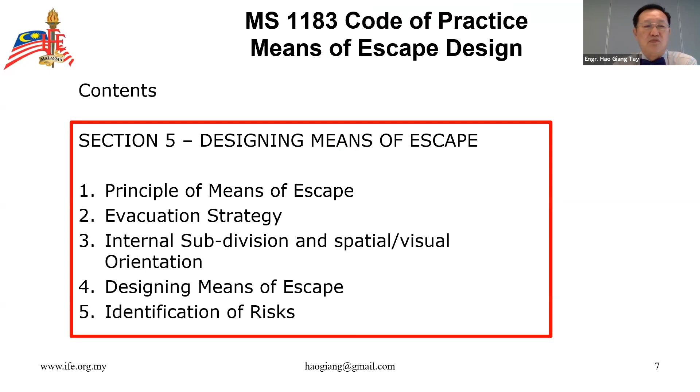You can look at that. This is the standard. As I say, it is quite expensive, but it is relevant, and it's very interesting. This is from BS 9999. In section 5, designing means of escape, you look at principle of means of escape, evacuation strategy, internal subdivision and spatial visual orientation, designing means of escape, and then identification of risk. They broke it down into several subsections, and then continue with minimum package of fire protection, horizontal means of escape, vertical means of escape, and additional means of fire protection. During my last session, I talked about the difference between horizontal means of escape and vertical means of escape.

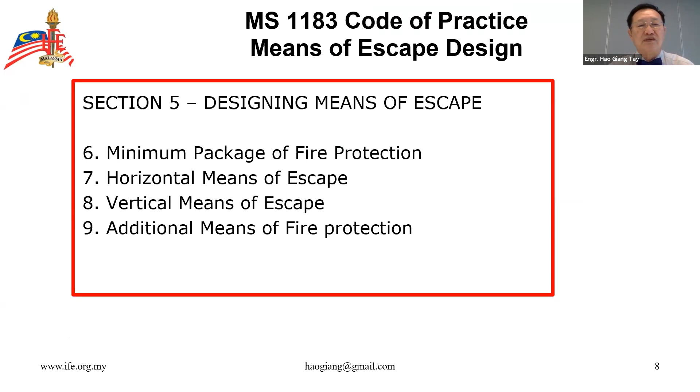The principle of means of escape is that provision for adequate means of escape should be determined and assessed against the development of the fire threat, time taken to egress, together with expected reaction and subsequent actions of those responsible for the management of the building. Assessment against the development of fire threat is at the moment not taken into consideration. That's why I always say that for professional architects or engineers, the fire module is lacking. If you design a building without looking at the fire risks, the fire threats, and also human response, then it will not be a complete design.

So the objective of means of escape design is to limit the time taken to travel through the areas of a building which could potentially be exposed to fire and smoke. This eventually also involves smoke control and management, which I have no time for today. Because for people to escape, we need a clear smoke height of at least 2.5 meters, and if you use a ventilation dilution method or purging method, nobody can survive. I will not elaborate here, perhaps in another webinar.

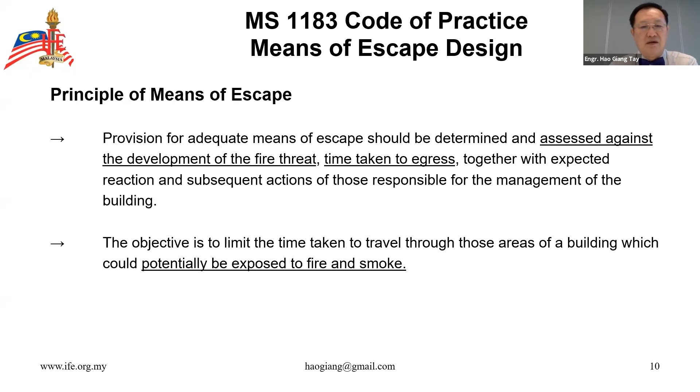Now, once you hear the alarm, what is important is the response time. How much time is taken to respond to the alarm? You decide to get up, walk to the door, go to the protected corridor towards the fire escape staircase, or you're too busy because your boss tells you that he needs you to finish the report before 12.

Then if you go further up, you'll be looking at 8, life safety strategy completed. That means this particular period, from the moment the fire developed until you evacuate, is called required safe egress time. Because when you get out of the building, you complete the objective of egress from the building.

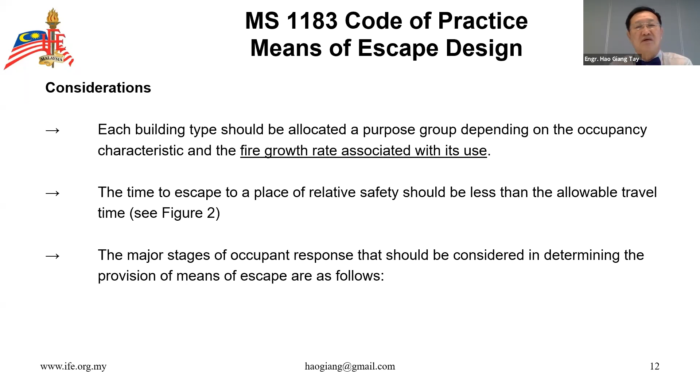Considerations for means of escape design. Each building type should be allocated a purpose group depending on the occupancy characteristic. Of course, you got all the schedules to refer to in UBBL. And the fire growth rate associated with its use. At the moment, this part is missing. We do not have the data bank.

That's why I always say, for an architect to actually design a safe building, you need to have a better understanding of fire behavior, smoke danger, things like that. Then only you can assess the risk. And then the data that is being stated in the UBBL becomes more meaningful. What do you mean by 1.12 second per meter of egress time horizontal, and what do you mean by 80% of that going down a staircase?

It's meaningless unless you look at where is the fire happening, how big is the fire, and who are the people you're looking at doing the egress. Are they senior citizens? Are they children? Are they people with disability? Or are they all assumed to be healthy young Malaysians of 20 years old, identical physical condition with the same leg length? Then only they can move uniformly at that rate.

We are now using one single rate to calculate the egress time, which I think is grossly insufficient and needs to be reviewed in this modern age. All right. The time to escape to a place of relative safety should be less than the allowable travel time. So there's two ways. One is that you go down vertically and egress the building, or for special categories of buildings, like healthcare facilities, hospitals, you can't move them. So you have to move from one compartment to a safe refuge area. But that's a different ballgame altogether.

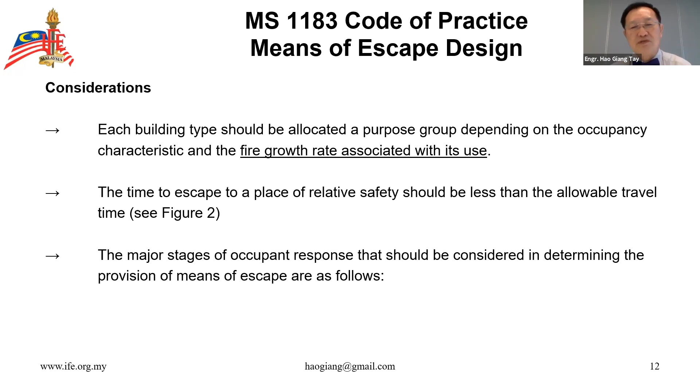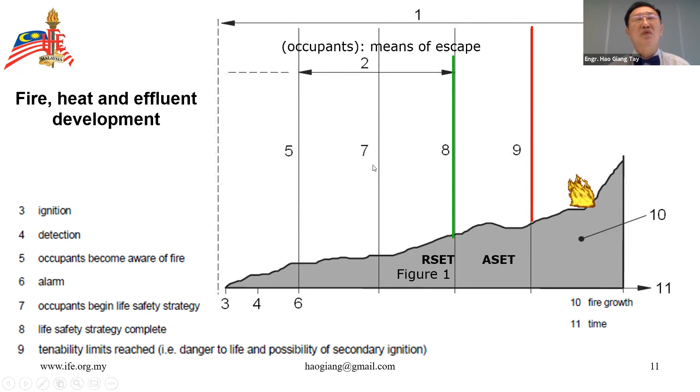Major stages of occupant response that should be considered in determining the provision of means of escape are as follows. Factor for mass evacuation. Time to detect a fire and sound an alarm. Now, talking about sounding the alarm, if you go back to look at the response time, do you think that people, when they hear the alarm, will start to prepare to move and then move? The answer, of course, is no. 85% of the people in the world, according to statistics, do not respond to fire alarms. Ask yourself, if you're in a shopping center and you hear the fire alarm, do you continue shopping or do you walk out of the shopping mall?

Let me tell you, of probably 5,000 in KLCC, every time the alarm rings, I'm the only one that walks out, looking like an idiot. But I know in my heart that if anything really happened, I'll be the only one that survives.

Okay? Pre-movement time, which consists of recognition time and response time. Travel time, including queuing, to a place of relative safety. And movement within a place of relative safety: protected corridor, smoke lobby, escape staircase, or adjacent compartment. All these, provided the relative safety compartments are all protected, free of smoke and flame. And that is another module we have to look at, why a protected corridor must be pressurized and not used as a purging compartment.

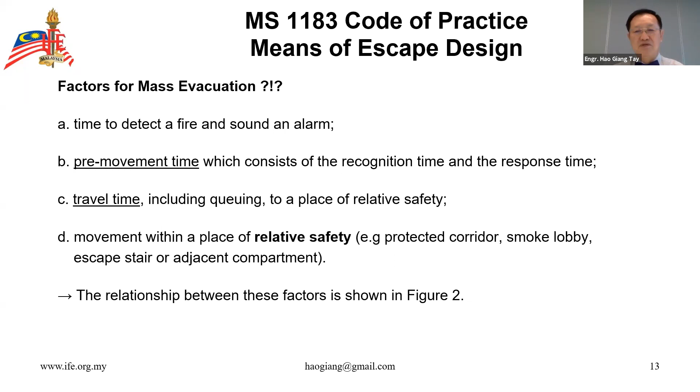All right. Then you've got the relationship between these two factors in figure 2. This one will show a clearer picture. Ignition, then you got detection time. Sometimes it takes about 2 to 3 minutes, depending on the sensitivity of the detector. So the fire started, picked up by detectors. The detectors will then send a signal to the fire alarm panel. The alarm will be raised. This is where the audio visual alarm is raised.

And then upon hearing the fire alarm, sometimes it still takes about a minute for you to recognize that it's actually a fire alarm. Then you make up your mind whether to move or not, right? So this is pre-movement time. It depends. A lot of performance-based engineers put about 3 minutes here, which I also disagree with, because if everybody ignores it, this becomes infinity. Everybody will still be staying around, and at the end, you exceed your available safe egress time. So from when you start to move until you evacuate, this is actually the available safe egress time.

All right, this is the period until you evacuate. This is the safe egress time. Sorry, this is available safe egress time. Now, number 7 is actually the required safe egress time. That means the time that you require to actually get out of the building, get out of the building before it becomes untenable. Red means that the temperature or the smoke level intensity in the building is already too high for occupants. All right.

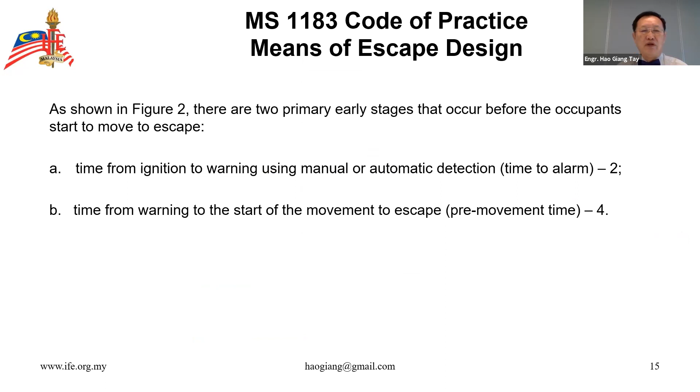So there are 2 primary early stages that occur before the occupants start to move to escape. One is time from ignition to warning using manual or automatic detection, time to alarm. Second one will be time from warning to the start of movement to escape. So it's 2 and 4. So these are the 2 crucial timings before you look at how long it takes to go down the staircase.

But the question I'm also asking now is, we keep designing higher and higher. In the last paper, I looked at Saudi Arabia building a building that is 1 kilometer into the sky. I don't think we look at that. We look at, let's say, our tallest building in town now is 118 stories. Now tell me frankly, how many of you think you can walk down 118 stories within the fire escape staircase in one go to stay alive? I think most of the answer is no, unless you're very fit, okay?

And it's not only you. You are only one of the participants evacuating downwards, descending in the fire escape staircase together with the rest of the occupants. If somebody in the front is slower than you, your flow will be disrupted. And then somebody behind that's impatient probably will start pushing and then end up with a stampede in the fire escape staircase with some broken legs and all that. And then eventually the whole staircase will be jammed.

Now, so we are looking in a realistic design: high-rise fire escape staircases, are they really safe? It's not just code compliance. It's not prescriptive, where you put a figure there, the width of the staircase can take so many people, complying to the floor density. No, I think you could seriously look at whether you can really get everybody out of the building. All right. This is fit for purpose, performance based within prescriptive code. All right.

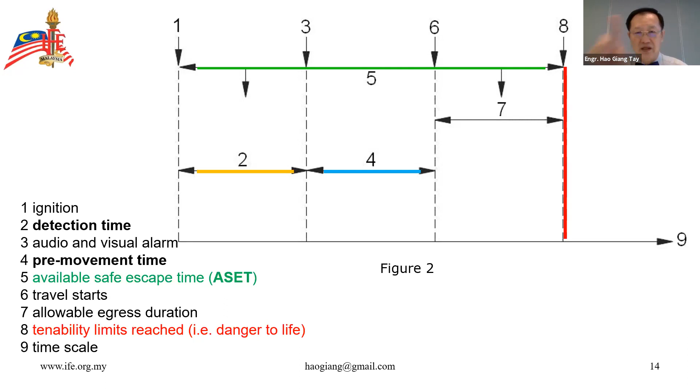Design consideration and movement to escape in many cases might not be along the optimum travel route because if you look at our UBBL, we are supposed to take only 50% of the egress as effective, just in case the other egress path is being blocked by smoke or fire. So in that context, now you understand why you need more staircases. Why do you need to make sure that the integrity of the protected corridor, smoke lobby, everywhere is being protected, all right?

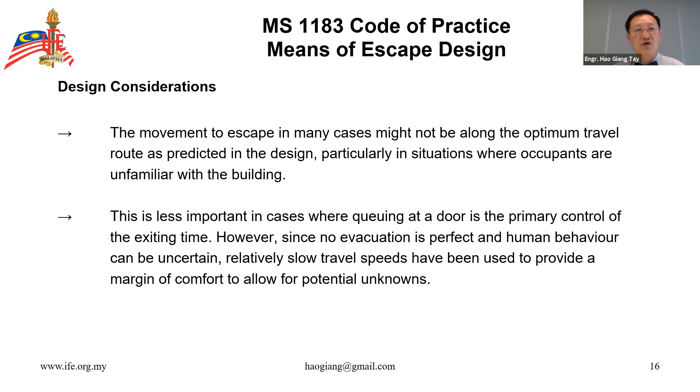Before you look at pressurization, smoke control. And also, don't forget that there is also queuing time. It doesn't mean that when you go to the fire escape staircase, the whole staircase is clear for you to descend. Sometimes there is a crowd waiting to actually go through that particular door. All right, so all these must be taken into consideration.

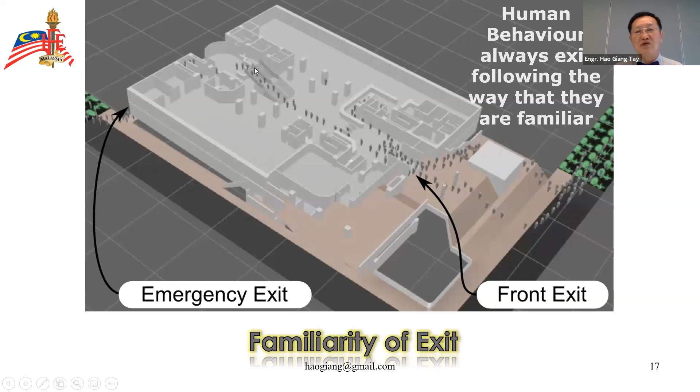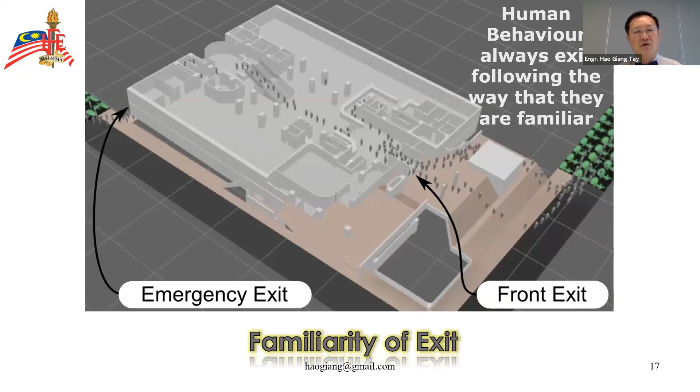Through many fire incidents, there's always good feedback, and this is one of them. Human behavior always exits following the way that they are familiar. So, assuming that this is a shopping mall, and you enter from the front, unless you're very familiar with the layout, normally for people who visited this mall the first time, if they are actually at the back and there's another exit that's nearer, they will not use it. They'll backtrack all the way to use the route that they are familiar with. This is human psychology, all right? It has been observed in many fire incidents.

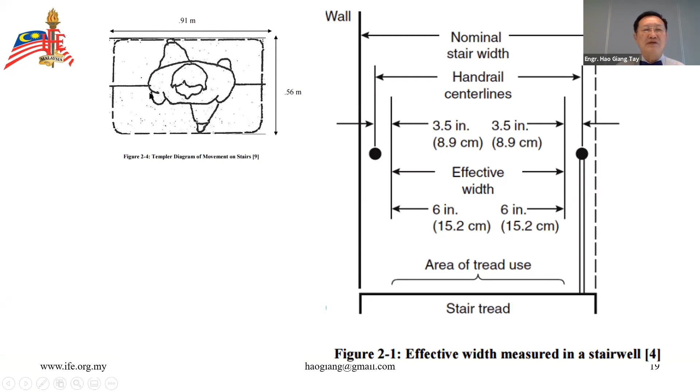Research-based means of escape design data. This one is also very interesting. You can take a look. Now, we always design using fixed data that's given to us, and we expect everybody can actually use it. But if you look at Scandinavian countries, they actually measure the person's space required during egress. You cannot take it that people are moving very close to each other, because psychologically you never will. And you also will never move along a corridor touching your shoulder with the wall. So when you look at the egress design, you've got to actually take all this into consideration.

The research done in Sweden is very interesting. In fact, they put a camera on top to look at actually the perimeters of a person when they are moving, the legs in front, the legs behind, and when they are standing still, all right? So you can see that this is actually more of a performance approach using realistic data that has been established.

You're looking at about 0.9 meter with 0.56 meter of space that you need to allocate per occupant. Then you look at how many persons are actually moving along the corridor. It's no more just floor density. Those are prescriptive; this is actually realistic. And with this, at least the end result will be different.

Then look at the staircase, this is a stair tread. You've got the wall, you've got the handrail, and you need the spacing, all right? Because nobody will walk touching the handrail, so you need another 6 inches. So this is the effective width of the egress path, and not what is being stated in the UBBL.

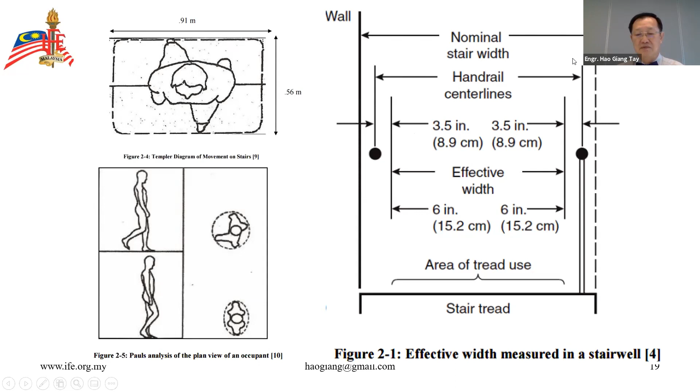This is another illustration whereby that is actually the width that is normally designed, but the effectiveness is not 100% because nobody will walk touching the wall. This is how people evacuate, and you can see that they are not like soldiers, 2 by 2, filling up the whole corridor. No. So if you look at egress, there are a lot of other factors that need to be considered.

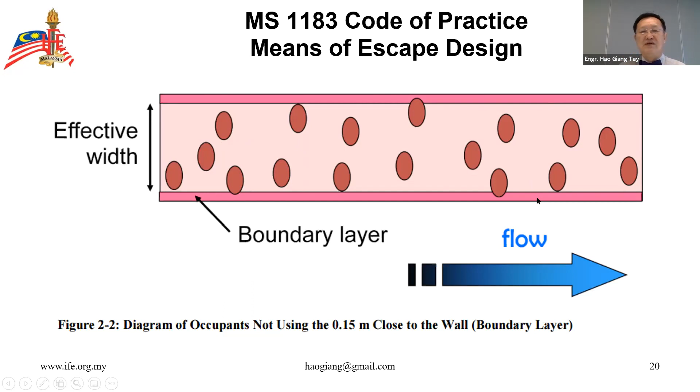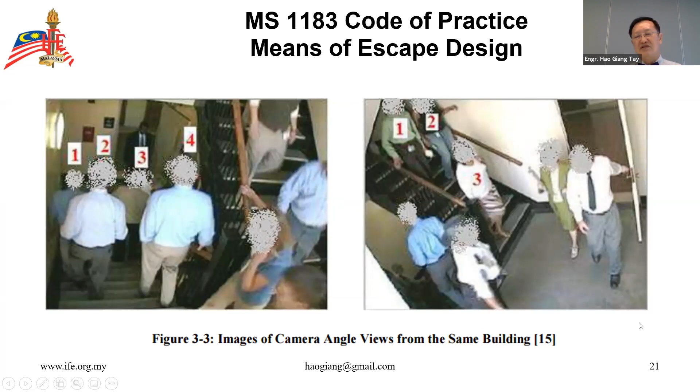They actually do a simulation using real subjects going down, doing evacuation, uninformed evacuation, and they use cameras to track them. All this data is recorded in the computer, and then eventually the data is analyzed. This is actually the first time a lot of studies have been conducted on evacuation. I believe a lot of this research has been carried out by UM as well, in Malaysia.

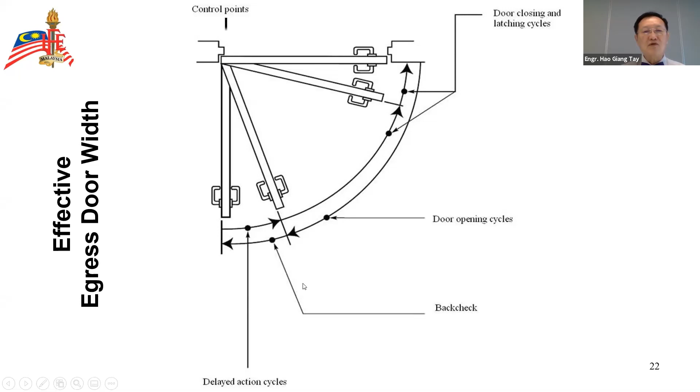So if you look seriously, if you are taking even this width, it's not realistic, because the actual effective width is from here to here, all right? Because as pointed out through the research, nobody will walk touching the surface. So you still need a gap for the occupants to stay away from any objects.

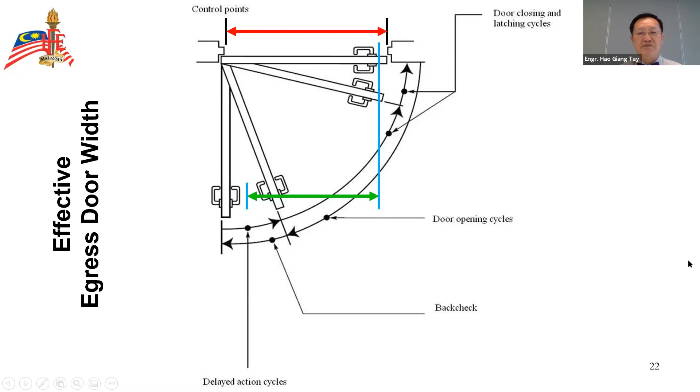So if you were to design using the prescriptive code or prescriptive data, you are again designing an egress width of this nature, which realistically is not applicable. Remember, the research data provided shows that you need space, all right? Front, back, and the side.

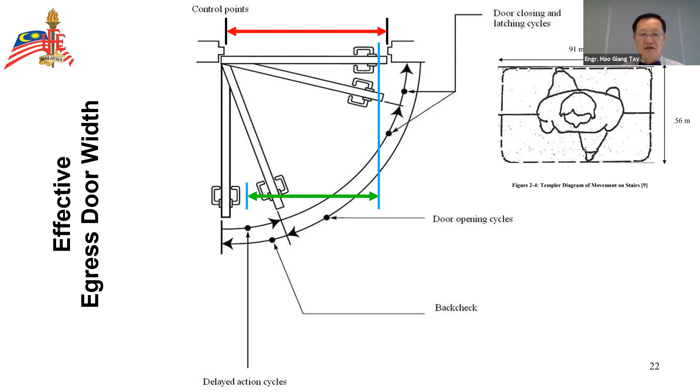Design considerations: in an emergency, there should be sufficient escape capacity to allow all occupants to reach an area of relative safety. Fire integrity is critical because fire doors cut off all the compartment openings. And fire doors in Malaysia have no maintenance. If that goes, you just do not have your protected corridor, your smoke lobby, or your fire escape staircase.

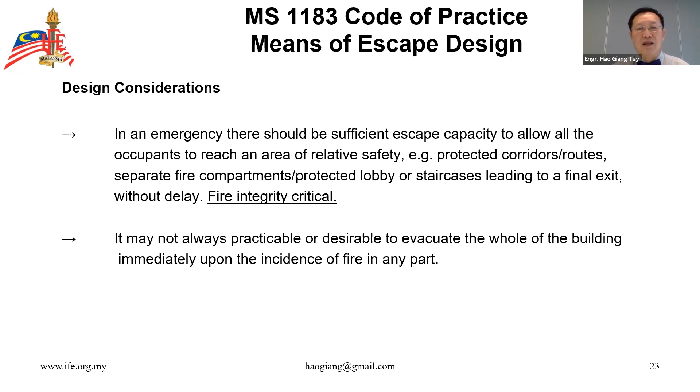Go back to the condominiums, just go and do a routine inspection, all right? Whenever you are in a hotel, whenever you're in a shopping complex, just take a look at the fire door and tell me that most of them are working. Everywhere I go, I do risk assessment, and I'm telling you, I'm really worried because most of the fire doors are not working, either sagging or not closed and latched. You need a door to close and latch, okay?

Okay, of course that's a different ballgame altogether. You need to look at it; it should be managed, should be manned, should be drilled, should be trained. And all these people are not going to be included with the normal occupants. They're supposed to be pre-selected, predetermined, grouped together, and evacuate through the fireman's lift. They're supposed to be differently managed.

What about stampede, panic? When they go down a corridor, there are people who walk very slow, obese, or on crutches, people who are not healthy, and there are people who are young, aggressive, and fast. We can already see that there could be a stampede in the fire escape corridor, the fire escape staircase. So has there been any plan for dealing with a situation like that? The moment you have a stampede, it blocks up the entire fire escape corridor. Then what's going to happen to the required safe egress time? There's none.

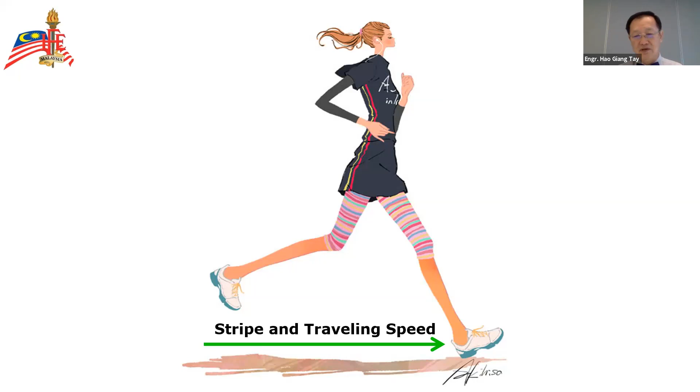Of course, nowadays we have computer-aided software that lets you preview what actually happens during a mass evacuation. Design considerations in large premises or super high-rise structures: phased evacuation is more practical, which is also beneficial for egress for people with disabilities. Now, if you cannot evacuate everybody from a super high-rise structure, then you need to look at this.

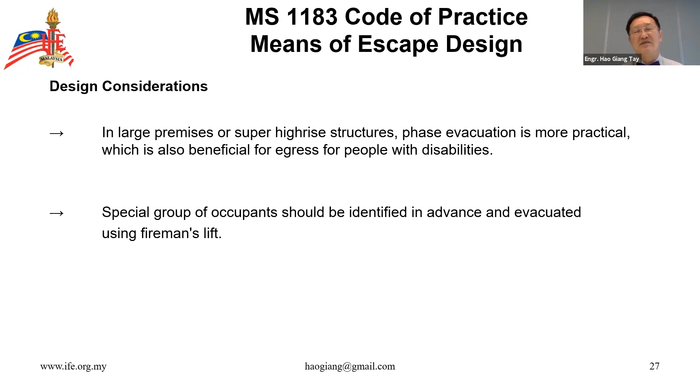Motivation to escape is important. Research into several major fatal fires and evacuations suggests that in mega complexes, people find it difficult to recognize the threat from a fire elsewhere in the building. For example, in a shopping mall, if fire happens at one end and you're at the other end, even though the bell rings, you look around and life is normal—everybody carries on shopping. You don't see smoke, you don't see fire, you don't see the threat.

But smoke can actually propagate very, very fast. The other danger is, if you went in with a family and got split up to different shops, do you think you'll just leave when you see smoke and fire, or go around looking for your family members? Human behavior is irrational. Do we have enough study into this, or do we just assume the moment the bell rings everybody walks out? The answer is no, definitely.

People are also likely to underestimate how quickly a fire can spread. In a fire disaster, the uncertainty of the situation in its early stage is usually compounded by a serious delay in warning the occupants. So there are a lot of factors we need to look into and consider.

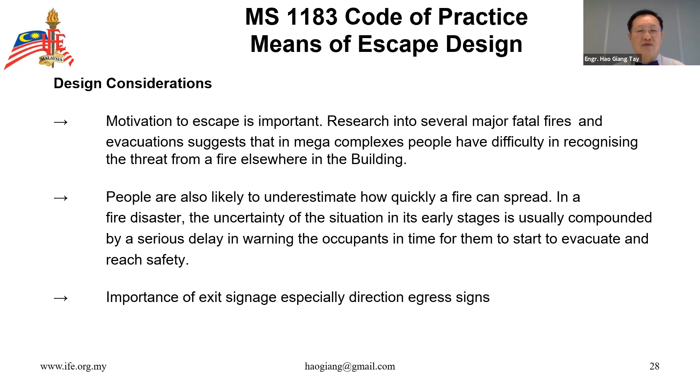Remember where we put all the emergency lighting—along the ceiling. In any building where there's a fire, where does the smoke go? To the ceiling. It flows along the ceiling.

I can tell you, if you look at the emergency lighting, they're all in plastic casings. Do you know that smoke particles, when they leave the fire source, carry a temperature of 250 degrees Celsius? What is the boiling temperature of water? 100 degrees. Some of this emergency lighting, I don't even know if it can sustain the attack and ferocity of the smoke particles—not even fire, just smoke particles, which are burned particles carrying temperature.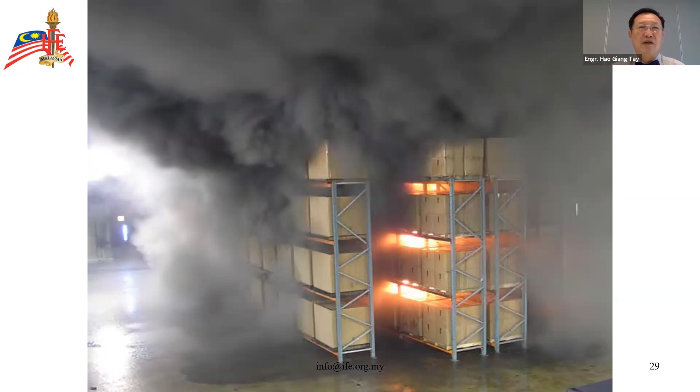So what is the evacuation strategy? The primary objective of any evacuation strategy is to ensure that, in the event of a fire, the occupants of a building can reach a place of ultimate safety outside the building.

This also poses another issue. Last time I was invited to deliver a paper for the Private Association of Hospitals Malaysia. When I talked about assembly points, one hospital's safety manager proudly said, Mr. Tay, we've taken care of that. I asked, where's your assembling point? He said outside the building. I asked, where is this hospital? Gleneagles Hospital on Jalan Ampang. I said, great—all your patients outside. Next morning the newspaper would say patients safely evacuated, but mowed down by the traffic of Jalan Ampang. So assembling point is not just anywhere, as long as you're outside the building.

I also asked them another question: what happens if it's pouring rain outside, a thunderstorm? Perhaps they should employ the bomoh with the fire coconut to make sure that on the day of the fire, the weather is excellent. There are so many things we cannot predict.

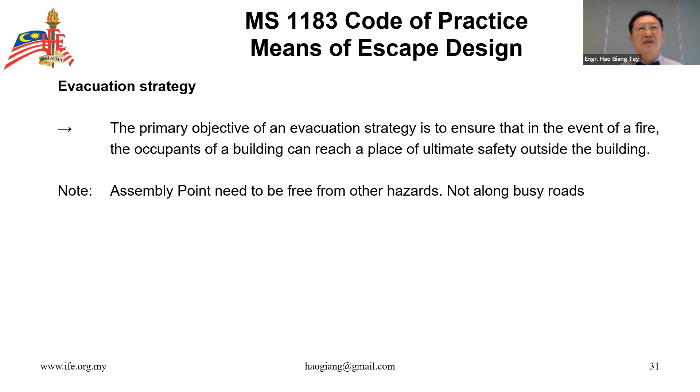In Malaysia, if you look at any evacuation plans, they stick on the wall along the lift lobby. Normally they are full of so much information that you can't even have time to read all of them. So I think the modern evacuation plan should be very simple. The rest of the information is not necessary and should not be included there. You want to indicate the arrow showing the flow of where to get to the nearest fire escape staircase so they can evacuate safely. These are some of the examples.

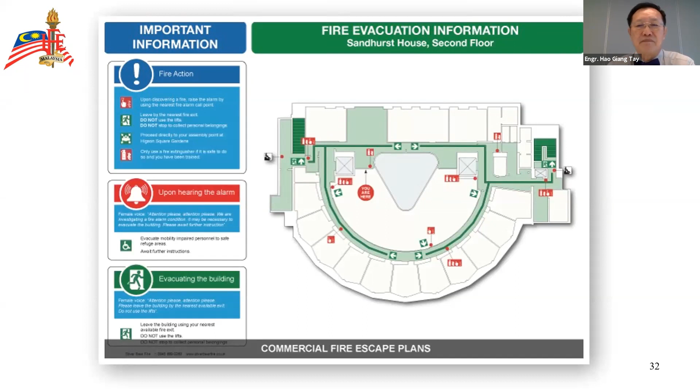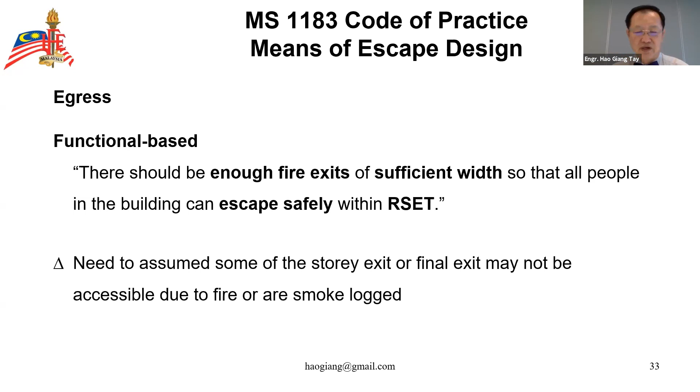So egress should be functional based. It should have enough fire exits of sufficient width so that all people can escape safely within the required egress time. And also, as I pointed out just now, according to our requirement, only 50% of the story exits are to be taken into consideration.

In the past, we always look at mass evacuation, even for high-rise now. But what I noticed is that drills are conducted yearly, but there's no logging of data on how long it takes all occupants to be evacuated. And there's no study or observation of the behavior of occupants within the building. There should be more in-depth studies of behavior of male, female, different age categories. Then with all this data, perhaps you can aid architects in future design of high-rise evacuation.

For super high-rise, definitely you will not be looking at mass evacuation, which we are practicing now. We should be looking at phased evacuation, like Petronas. They have a very well prepared evacuation program. I've been briefed a few times there. Every time the international president of IFE is in town, I bring them there because it's our iconic building, and they conduct a safety briefing for all of us. They are actually very thoughtful about making sure that the moment there is a fire alarm, they have an internal ERT, emergency response team, to go investigate.

Meanwhile, 10 floors of occupants will be moved below the fire floor, just in case, because it's going to take some time. The rest of the occupants will stay and continue working until it is confirmed there's a fire incident. While they're still trying to put out the fire, then the real evacuation mode will be put in place.

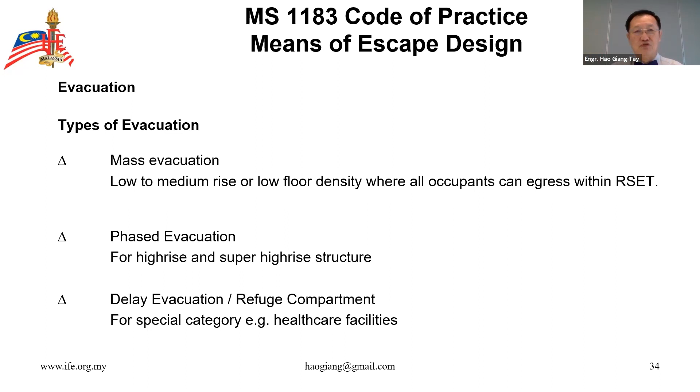Delayed evacuation refuge compartments are more for healthcare facilities like hospitals. I always say hospitals need to practice a zero fire policy, and it's almost impossible to evacuate the whole hospital. I have no time today to talk about that. Perhaps another webinar just on issues and challenges of fire safety in healthcare facilities.

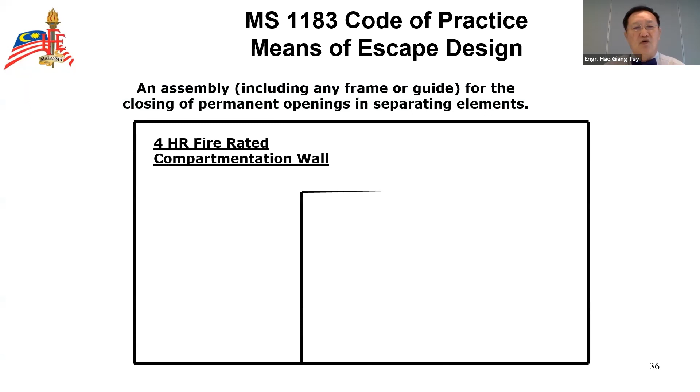Fire resistance door sets are actually very important because they protect all the compartment walls. You can have a 4-hour door, a 4-hour wall, but if you do not have a working or fully operational fire door, then the integrity of your 4-hour fire-rated compartment wall will be compromised. Yet there are so many things to look into for the door to operate properly. Your door has to pass the test in terms of not only integrity but insulation, but also has to pass the cyclic performance test.

Now, a door consists of so many components: ironmongery, hinges, stainless steel hinges, automatic door closer, lock sets, latch sets, and for double leaf doors, auto bolts. Now, all these are actually applying different stress onto the door leaf. And so the door that is subjected to wear and tear when opening and closing it will not last forever. But yet in Malaysia, our fire doors have no lifespan.

In buildings that are already 40, 50 years old, you can still find the old fire doors there, which have already expired. Again, I have another paper just on this particular area of research carried out by my MSc degree student in UIA, which is very interesting because I actually confirmed through her research thesis that doors really have a lifespan, because in SIRIM we test all the fire doors to 100,000 cycles.

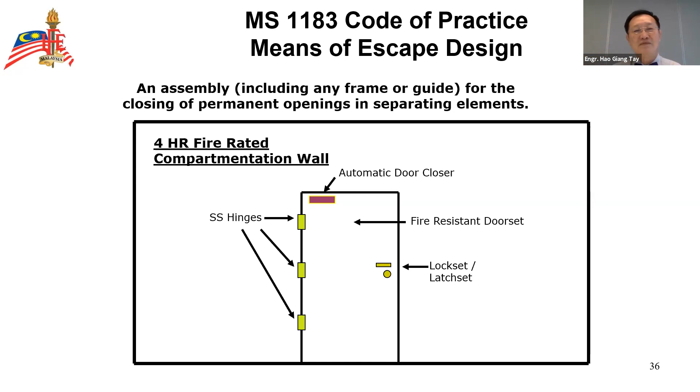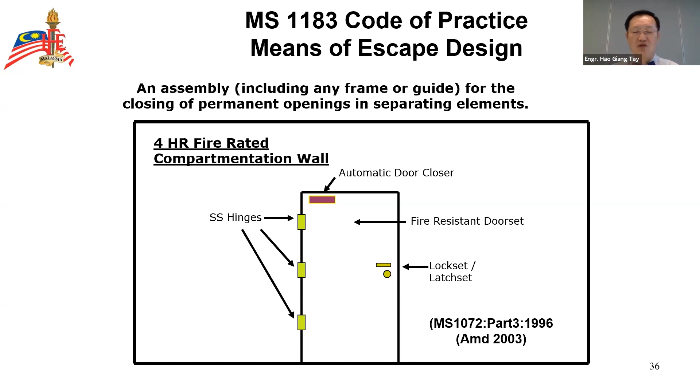So for these particular doors, you can refer to Malaysian Standard 1072, Part 3, 1996, with Amendment 2003. We are the only country in the world that tests the performance of the door. I really checked. No other country did that. Why are fire doors critical to life safety? Because they're part and parcel of means of escape design. Without that, you have nothing.

If you look at the fire escape staircase, every floor is protected by a fire door. If you compromise that fire door, you don't have pressurization inside the staircase. And if you do not have pressurization in the staircase, smoke can then get into the staircase, flow upwards, and nobody can escape.

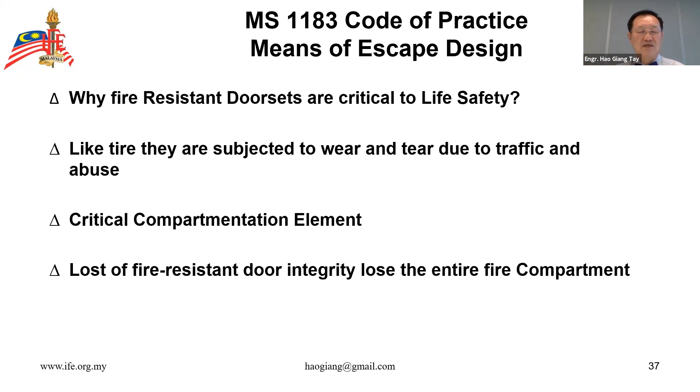Okay, so they are just like tires. Can you use your tires for more than 5 years? No. Even though you park your car and seldom use it, the tire lifespan is still 5 years. After that, you have to change. Otherwise, the rubber compound hardens and you lose your grip on the road. Okay.

These are some of the examples whereby if you look at our fire doors, are they well maintained? No, they are being kept in open position because the door closer is not properly adjusted. And yeah, the door is there, but imagine if the particular corridor or the compartment has a fire, the smoke, everything, the flame will then come through. So you lose the compartment's integrity.

So many times the doors will be wedged. This is actually even worse. This is actually a fire escape staircase fire door, and across the other side actually is a car park. So when you open the ground floor doors and wedge them open for ease of traffic, imagine that the car park risk is higher than the shopping complex. And when there's a fire there, the smoke comes into this area and floats upwards. Again, nobody can escape.

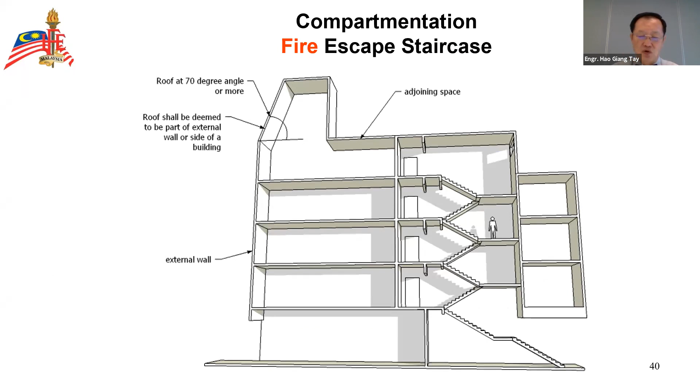Sorry. So if you look at the fire escape staircase, the final exit should actually open to what we call outside the building. All right. You cannot land a fire escape staircase within the building, which, if you go to America, some of the buildings did. Which means that when you travel all the way to the ground floor, you still have to negotiate your way through the foyer to outside the building. In Malaysia, that is not allowed.

This particular diagram demonstrates how important a fire resistant door set actually is. Imagine if that is a fire escape staircase of 60 floors and the fire happened on the 5th floor and the doors are not maintained. The smoke, everything will then get through and go up while you and your family are coming down. You can imagine what is going to happen. It's going to be a disaster, just like Grenfell Tower.

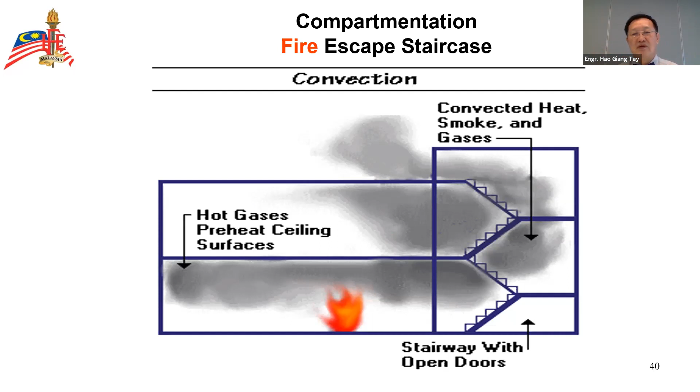Smoke gets in, and it's not because of anything else. It's because in the past, they believed in putting the landing valve of the wet riser system inside the staircase landing. So when the firefighters connect the hose and pull the 2.5-inch hose through the fire door onto the floor to fight the fire, the door is kept in what they call semi-open position because they can't close it fully. So the smoke goes into the fire escape staircase, which is filled up with hot, thick, black smoke, resulting in 72 victims. So very, very crucial, all right?

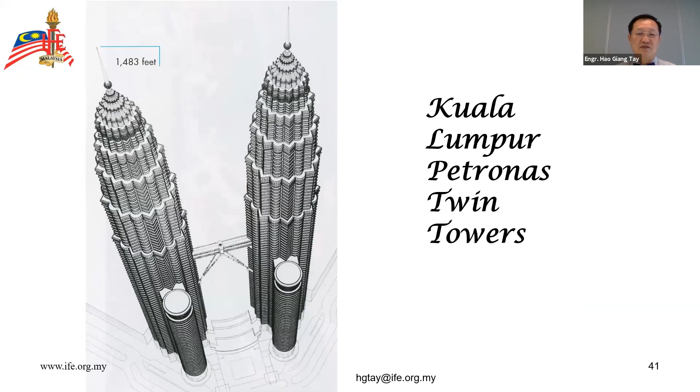Petronas, you can see that, as I already explained, we have a sky bridge, which is good. If you have a fire here, everybody will then come down by staircase. Occupants here, if it's a confirmed fire, will then come down by staircase, cross over, and then be taken up by high-speed lift. So to manage an 88-story building, we actually split it into 44 floors each, which is actually very good.

But all these are actually managed. Evacuation by lift cannot be a free for all by the occupants. It has to be by the management, trained in crowd control techniques, okay? And also they must have enough lift capacity, taking into consideration the density of the occupants. Now in Hong Kong and China, lift evacuation is mandatory.

Refuge floors are also now a feature that is essential for high-rise or super high-rise commercial buildings. The purpose of the refuge floor, as I pointed out, is that it's impossible for everybody to actually walk all the way down. If this is 118 stories, you've got to think about it. Even if you are physically very fit and young, do you think you can still walk down 118 stories in one go, non-stop?

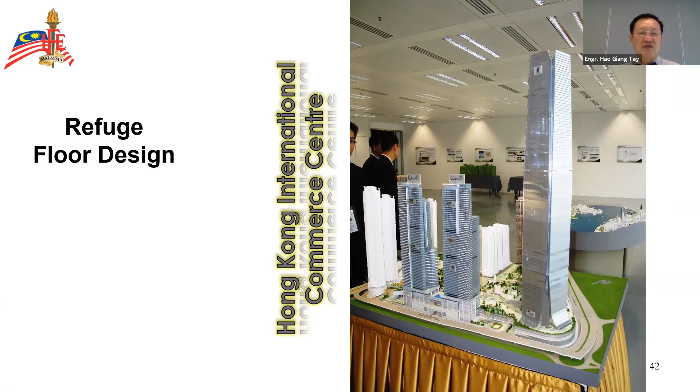If you cannot, then you can imagine the rest of the category of people: senior citizens, pregnant ladies, obese people, children, people who are injured, people with disability. If you mix everybody inside a staircase, I don't have to tell you what kind of disaster we are looking at. In Hong Kong and China, it's mandatory now. Also in Singapore, you need refuge floors, whereby you can select the mechanical floors to have the space to accommodate occupants who are tired when descending through the staircase. They can take a rest here.

And on these floors, nothing is combustible. Ventilation is not necessary because at that height you have a free flow of air. All the columns, this is a steel structure, have to be protected. And they also have a spray and what they call a water curtain system to make sure that if there's any smoke from the floors below, it will not enter.

But having said that, there are two issues. One is that this, by right, should be, I do not know whether Hong Kong did it or not, tested in a wind tunnel. Because the higher you go, the vertical wind velocity is going to be very much higher than on the ground floor. So if you have smoke coming out and the wind velocity is high, probably even the water curtain cannot stop it.

Do you know our Twin Towers, at the top there are two pinnacles. On a normal day, they can sway up to about 1 meter at the top. So the wind factor is one factor that has also not been taken into consideration in M&E design at the moment. I've already commented on this for quite a number of years.

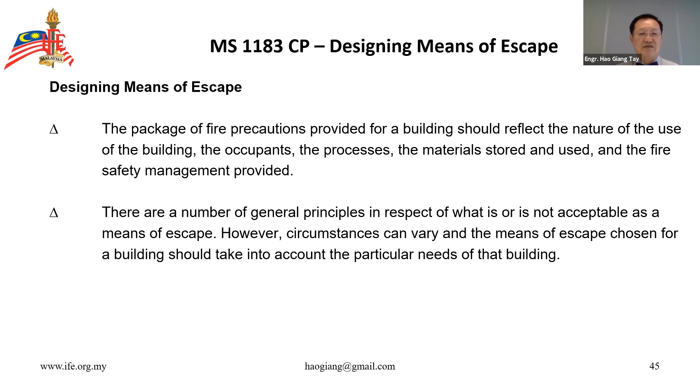So there are also certain things that you should not do when you design means of egress. So, do's and don'ts of means of escape design. All escape routes, including treads of steps and surfaces of ramps and landings, should be slip resistant. Some fire escape staircases, when I go inside, are all cement screed only, so at times it's slippery. So the nosing there should incorporate a non-slip feature. Potential reverse flow situation: in the Twin Tower, New York case, because the fireman's lift was disabled, firefighters had to enter the building and climb up the staircase.

But we all know that architect design doesn't have provision for firefighters' counterflow in the fire escape staircase. That's why when you design the fire lift, fireman's lift, smoke lobby, all these are very, very important. For high-rise super buildings, provision of firefighters going up the fire escape staircase with the equipment is one of the concerns now. So if you look at the new buildings that are replacing the Twin Towers, all these considerations are being taken in during the design. They allow about 20% more width in the fire escape staircase.

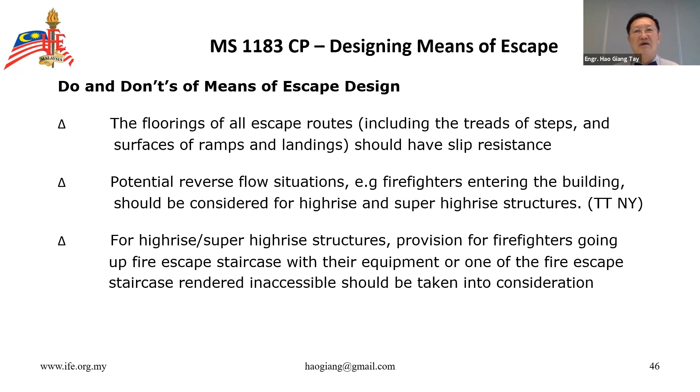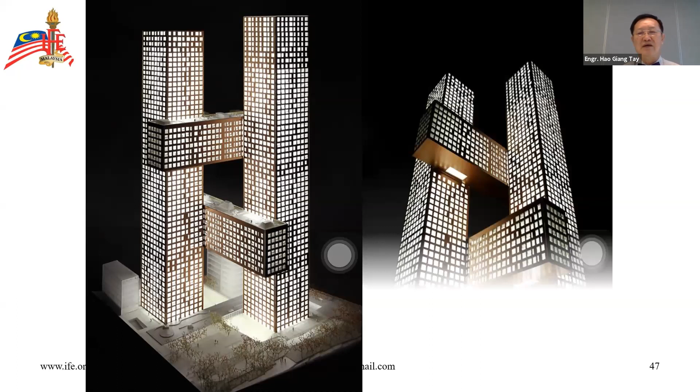There are a lot of innovative high-rise structures, and you need to actually look at the design and then come up with proper SOPs for evacuation. I like the linking bridge, the linking part of the building, because it provides more alternatives for egress, but at the same time it has to be very, very clear, because occupants might get confused. Now for Twin Towers, they have an evacuation program whereby all the tenants are briefed about the procedure SOP, and they are drilled every year. So everybody knows what is to be done during any emergency.

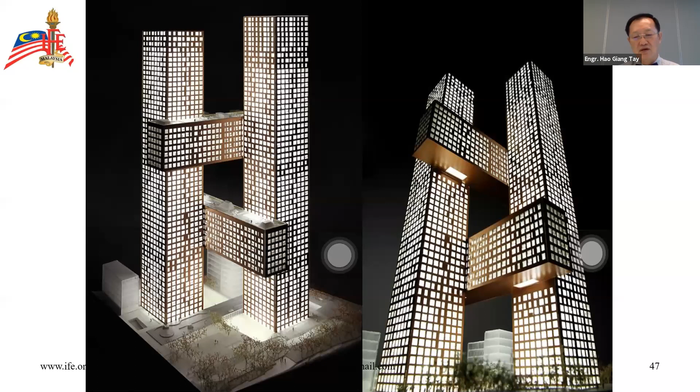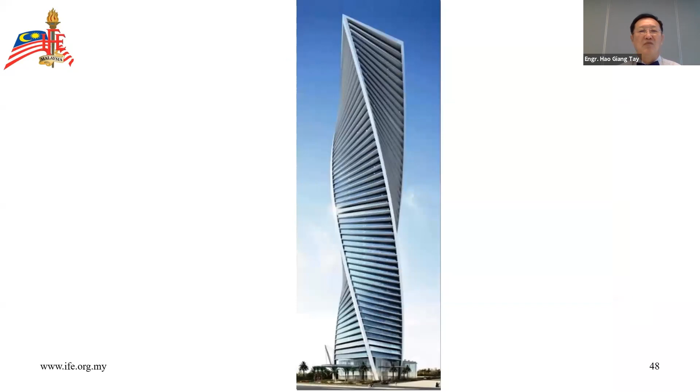How do you design evacuation for buildings like that? Because north direction could become south after a few floors if you turn around. So there are challenges in the modern building. This particular condo in Putrajaya is actually designed with jogging tracks. It's fantastic. You don't have to leave the building, going across and coming down. So these jogging tracks also pose different risks in terms of evacuation, because there may be confusion during the evacuation, whereby they thought this could be the safe haven.

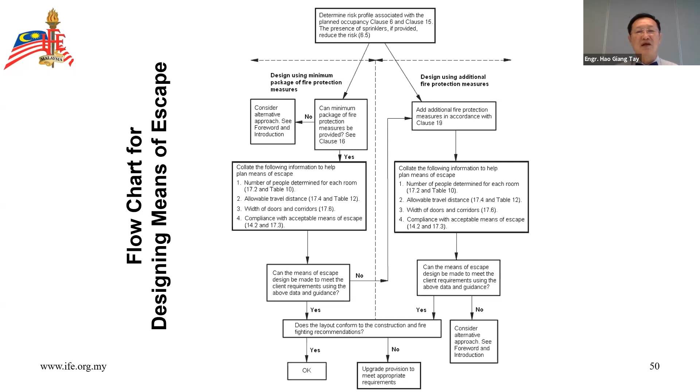If you look at MS1183, they also use a flow chart for you to design means of escape. If you go through this flow chart, at the end of the day, you know whether it's okay or not. I won't go through it because of short of time. Make sure you get a copy of the MS1183, and then you should be able to look at it, because there are a lot of references inside there.

Acceptable means of escape. The following means of escape are generally deemed to be acceptable for buildings: door leading directly to outside air, door leading to a protected staircase, door leading to another fire compartment. These are for horizontal evacuation. Open and ventilated staircases, pressurized fire escape stairs enclosed in a compartment shaft, ramps conforming to 1184 with a gradient not exceeding 1 in 12, suitably designed, installed and manned evacuation lifts, and the crowd control management system.

Now, if you look at the first three items, you're looking at doors. Other than the final exit, you need a fire door. So hence, fire resistant door sets are very, very important. So when you select the door manufacturer or the supplier, make sure that the door they supply fits your specification.

I always say that you cannot just let them supply the type of ironmongery that they tested. You must already pre-specify what ironmongery you require, with the brand, with the quality. Maybe you should call a pre-qualification exercise before the real tender, and only allow those who qualify in the pre-qualification to tender. Then the market will shape up, and they will have to test the ironmongery you specify, because a lot of the ironmongery they tested is the cheapest and might not be relevant to your application.

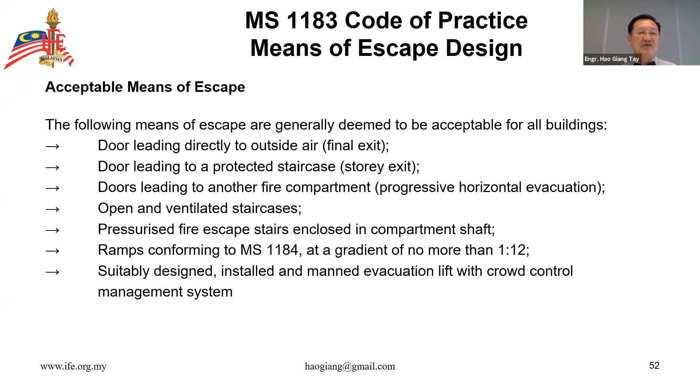Unacceptable means of escape. Lifts, except for suitably designed, installed and manned ones. So it cannot be for any building. It has to be a well thought of program, and the management must have enough manpower to do that. Fixed ladders that you need to climb vertically, definitely no. Portable ladders, no. Power operated or manually operated sliding doors also cannot, because these could be subjected to power failure and get stuck. Escalators are also not. That's why normally escalators have either a drop curtain, smoke curtain, or a roller shutter to close it. Revolving doors, turnstiles, and automatic doors, no. You cannot use these as part of the egress route.

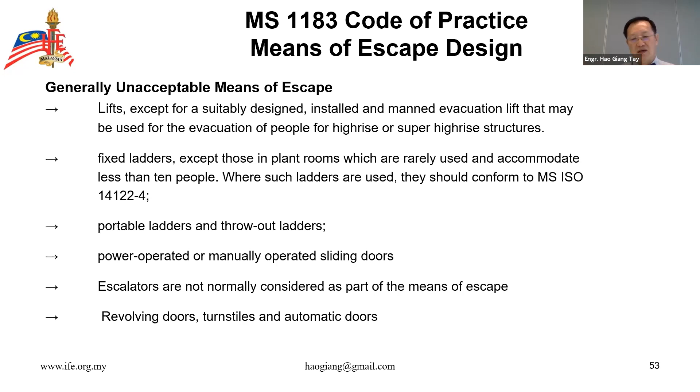Artificial and emergency escape lighting. I already pointed out that the way we mount it now is in doubt. I prefer the spotlight type of emergency lighting. You hang it lower from the ceiling along the wall, so at least it's not so much affected, compared to the normal emergency lighting on the ceiling. And normally this spotlight type of emergency lighting is also more powerful, and you can adjust the angle as well.

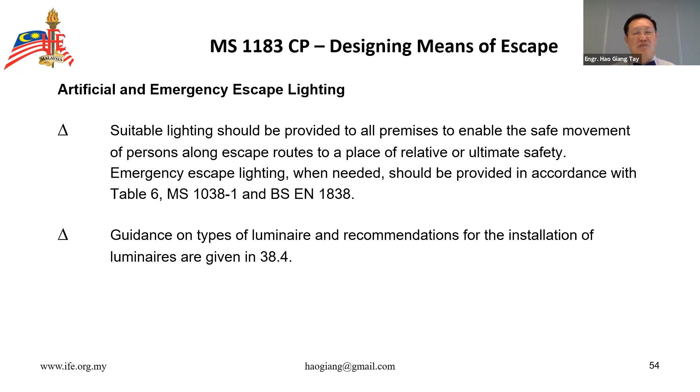By the way, emergency lighting also depends on rechargeable batteries. They have rechargeable batteries, but these batteries have a lifespan of probably about 5 years. For a lot of the EL, I believe nobody changed the emergency lighting battery. So imagine that a lot of them will also not come into operation during a fire incident where power failure is initiated.

Now, when you talk about designing egress, you want to look at occupancy. We always assume that all occupants are awake and ready to respond to an alarm, but not necessarily. In fact, if you look at MS1183, they look at different occupants: occupants who are awake and familiar with the building, or occupants who are likely to be asleep. So you have many different types of occupants.

In an office, normally they are awake and can respond. What about hotels? Do you know that when humans go to sleep, their senses drop? That's why for alarm bells, the sound pressure level in the hotel room is 10 dBA above what is outside, let's say in a shopping complex. Normal minimum sound pressure level in a shopping complex is 65 dBA, but in a hotel room, it should be 75 dBA at bedhead.

All right. So this particular MS is actually quite good. It gives you guidance, further definition of different types of occupants under different alertness conditions, so that you can then look at the guidance for design. This is exactly what I say.

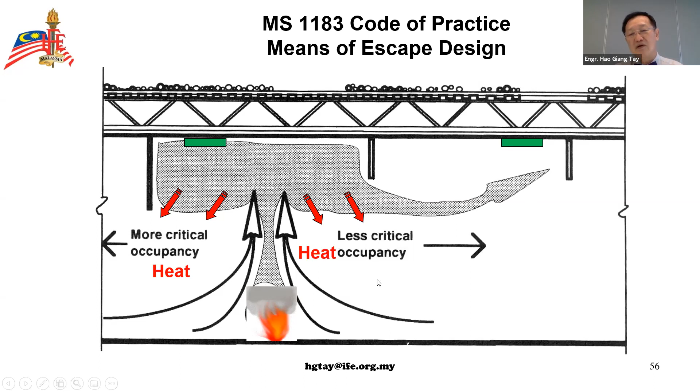Exit signs, we are still putting on top of the door according to the requirement of UBBL. I think we've got to start marking the base of the door with something. There is what they call intermittent low-level signage. If you go to Korea and Japan, they mark the arrow along the skirting, so that in case the exit sign is obscured by the smoke layers, you can still find the egress route.

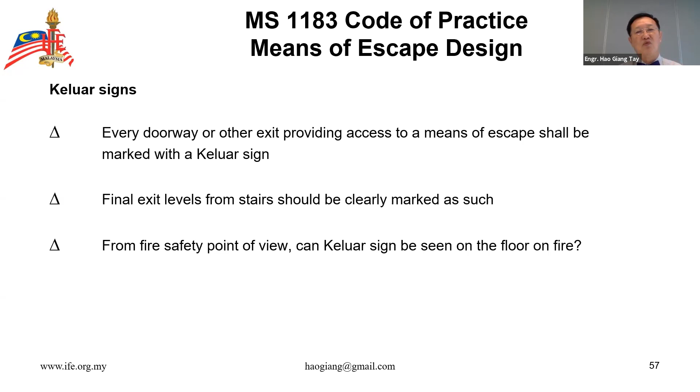I will show you this. If you look at Scandinavian countries, they now have it designed into the carpet and illuminated. So you don't have to look anywhere, just follow the arrow, even when crawling on the floor. Imagine this corridor is smoke-logged at the ceiling layer. You can still escape. And in China, they now even put it on the shopping center floor, permanently illuminated. A lot of airports in the world also incorporate this design concept. No more at the high level.

Okay, time's up. I thought I got 5 more minutes. Yeah, Tay, you can wrap up. I think we can give you another 2 or 3 minutes. Okay, it's coming to an end already. Can you release the control? I need to move the slide. Oh, were you in control of the slide? I'm not in control now. Actually, it's about 2 more slides, then I'll wrap it up. Whoever's in control of the slide, can you release the control back to me?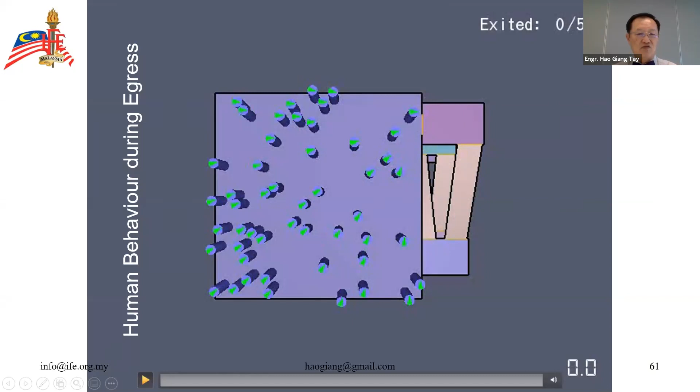This is another photo showing that, of course, some of the shopping complexes have a lot of those discount arrows. Make sure that you do not follow the wrong arrow and end up at the wrong place. All right. Now, there are softwares now that can actually show you what happened during evacuation. And it's very interesting. You can then see why there is congestion at the exit door. Up here, look, there are 50 persons in this room, and this is a clock running. You can see people going down the staircase, how long it's going to take, and how many people eventually can get out of the building.

You see, it's not like what we think, that everybody can go through the door immediately. No, there'll be a queue. And there's another scenario: imagine this is a very big shopping complex, people get impatient and somebody just walks off to look for another egress route, and a lot of people follow him. This is called follow the leader syndrome, and it happened. And this group of people eventually all died. Instead of waiting patiently, they just moved off, and the rest followed him thinking that he knows another way. Actually, it's not true. He just got impatient.

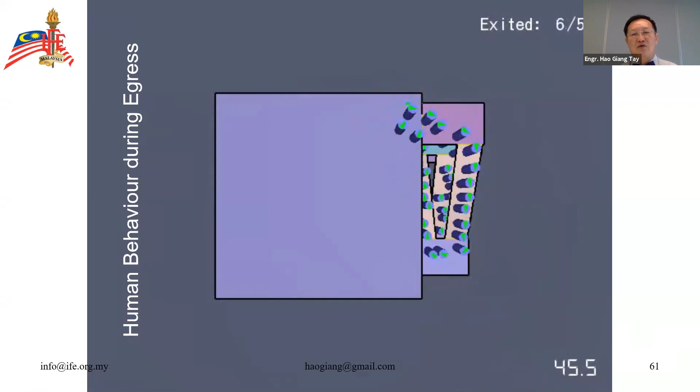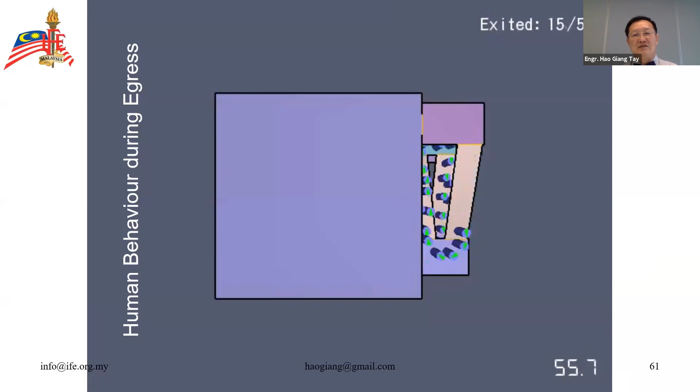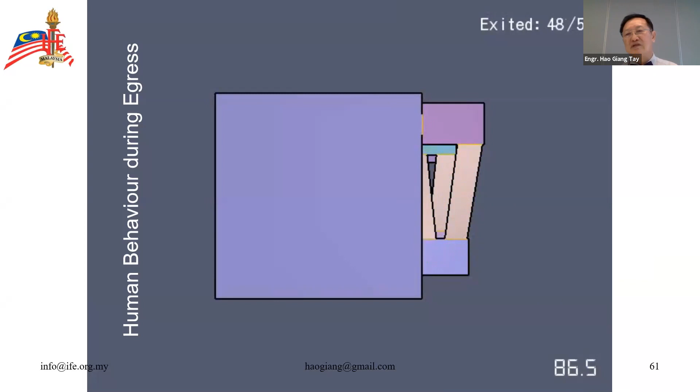So there is now quite good software that can actually simulate, and you can see where the problems of the design are. So it's actually quite practical to do simulations nowadays. It's not only fire modeling simulation or FDS, but you can do evac simulation as well. So you can look at the clock that's running, whether it's still within the required safe egress time, or does it exceed the available safe egress time, depending on the fire risk, the fire size and all that. So it takes more than 1.5 minutes to evacuate 50 people. This is only double story.

Okay. Thank you. All right. Thank you very much, Engineer Hao Giang. As always with your presentations, there's just so much material there. In the given time, it's always as if we're covering just the tip of the iceberg. There's so much down below that we just couldn't cover. We wish we had another 10 hours on this, but there will be room for another session after this. We can always do more.

Yeah, I can tell you 1 hour is not enough for me. Yeah, it's never enough. You look at so many side issues that if I go in, it becomes a full module, you understand? Yeah, well, food for thought. Anyway, this is good to start people thinking. I think this is basically what we are doing today, all right? Yes. Get people to start thinking. It's not so simple. Exactly. We've turned on the light bulbs in everybody's head, so now we have to keep them burning. All right. We do have some immediate questions that we can go through.

So okay, I'll just run through it now. We have the first question from Ao Hui Fang: which regulations or guidelines can we refer to for the temporary holding area within a high-rise building while waiting for a rescue team? Actually, there's none. At the moment, I do not think there is any provision for that, because we are still looking towards mass evacuation. So you are not supposed to go into any temporary holding.